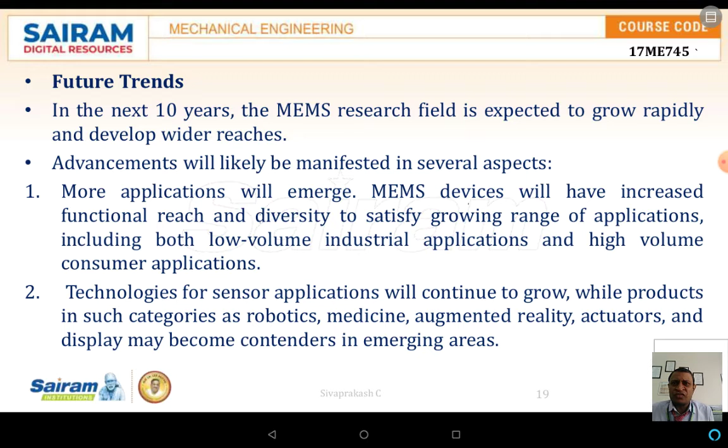Now as you know, MEMS devices are increasing with respect to function, reaching a diversity and satisfying a growing range of applications, especially industrial volume and consumer applications. The technological applications have grown rapidly, especially in the field of robotics, medicine, augmented reality, actuators, displays, and may become a contender for the emerging areas.

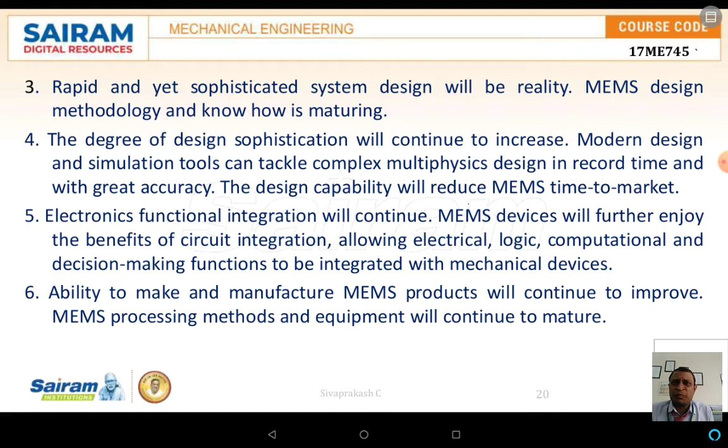As we know, electronics functional integration will continue, and MEMS devices will further enjoy the benefit of circuit integration, allowing electrical concepts, logical computation and decision making functions to be integrated with the mechanical devices. The ability to make and manufacture MEMS products will continue to improve, and MEMS processing methods and equipment continue to mature.

MEMS capability will advance steadily to a point that a true fabless MEMS development model may become a reality, especially in the field of packaging technology and implementation with smaller size components. MEMS production will migrate to a larger wafer size. The competition will intensify as MEMS products gradually achieve greater function with small size and lower cost.

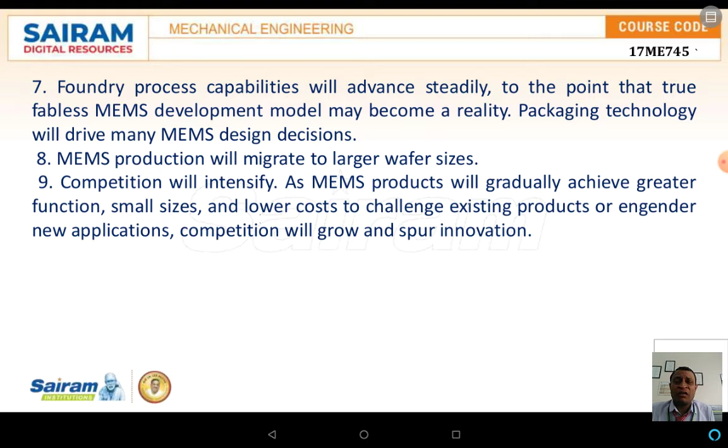The challenging and existing products and the competition in the market is also a major issue. Now as you know, MEMS is playing a major role whether in the mechanical, electrical, medical, or even the defense field; it has matured.

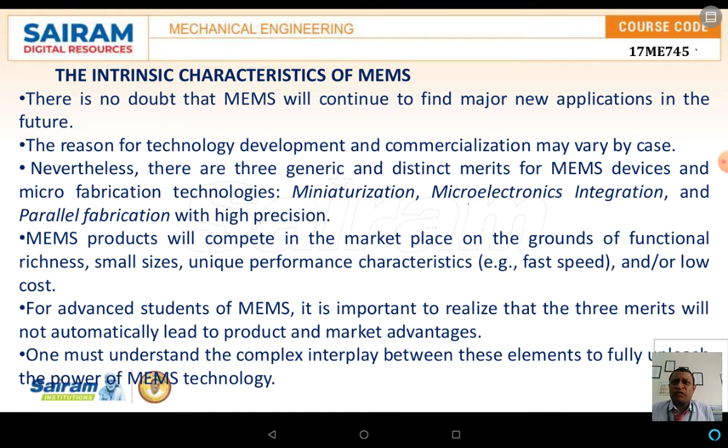Now the intrinsic characteristics of MEMS: MEMS will continue finding major applications in the future. The reason behind this is miniaturization, microelectronic integration and parallel fabrication with high precision. MEMS products will compete in the market on the grounds of functional richness, small size, unique performance and faster speed. The technology has advanced and reached the heights of nanotechnology.

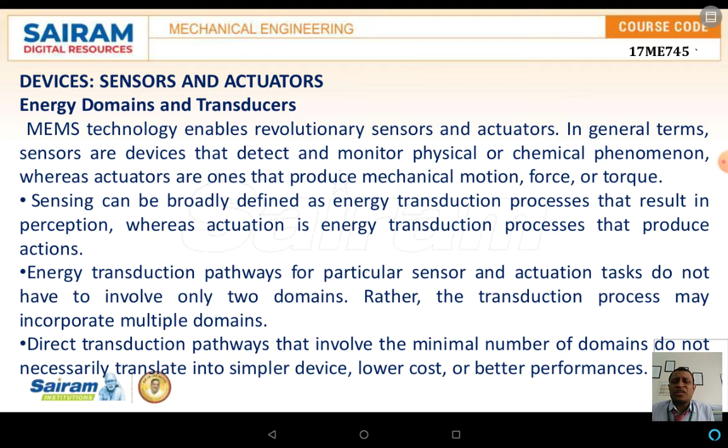Now, take the example of devices like sensors and actuators; the MEMS concept has been implemented in the field of sensors as well as actuators. In general terms, sensors are devices that detect and monitor physical or chemical phenomena. Sensing can be broadly defined as an energy transduction process that results in a perception, whereas actuation is an energy transduction process which produces action. That is the major difference between the sensor and the actuator.

Now take the example of the radiative field, magnetic field, thermal field, electrical field, mechanical or even chemical field. These fields have seen an invasion of MEMS technology. Not only these fields; even the medical field has been reached.

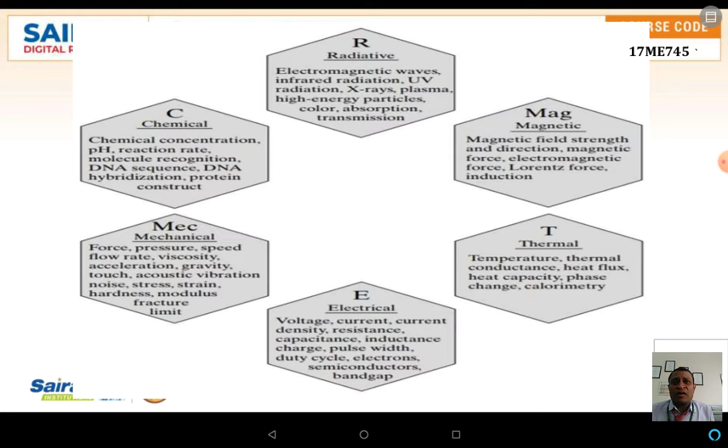Take the mechanical example: forces, pressure, speed, flow rate, viscosities, strains and stresses can be measured very easily using MEMS technology. Now, the sensors and the actuators.

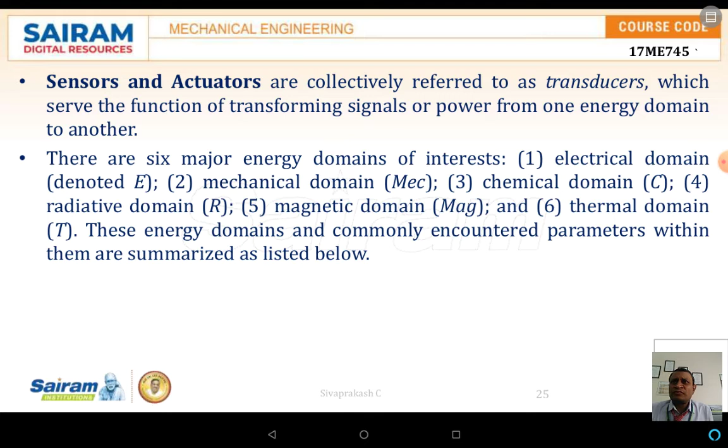As you know, the sensors and actuators are collectively called transducers, which serve the function of transforming a signal or power of energy into another form. Now, there are 6 major domains, especially the electrical, mechanical, chemical, magnetic, and thermal fields. These are all the fields where MEMS has encountered a parameter within them, and it has even reached the maximum limits. Now, the total energy within the system can coexist in several domains and can be shifted among the domains under the right circumstances.

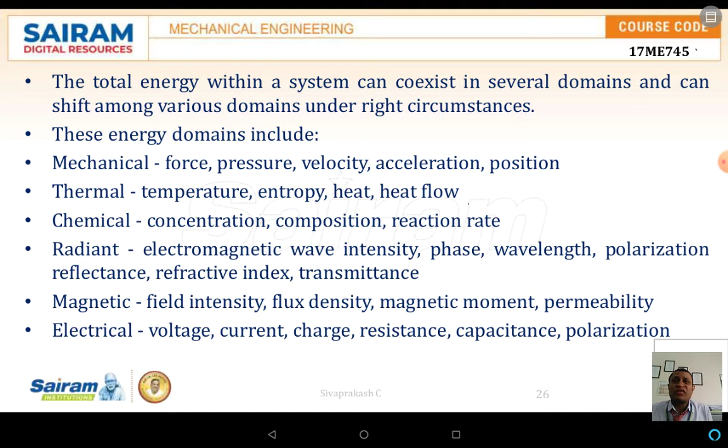In the field of mechanical, as I told, the forces, pressures, viscosity, velocity, acceleration, position, and even the stress and strains, all these things can be measured and detected very easily by using sensors. The sensors are of two categories. The first one is a physical sensor. The second one is a chemical sensor. Another sensor which has evolved is the biological sensor.

Now, the physical sensors are used to measure physical variables such as forces, pressures, temperatures, flow rates, viscosity, strains, stresses, etc. The chemical sensors are used to detect chemicals; it may be in the field of chemical or in the field of biological also, like pH, binding strength, protein-protein interactions, and so forth.

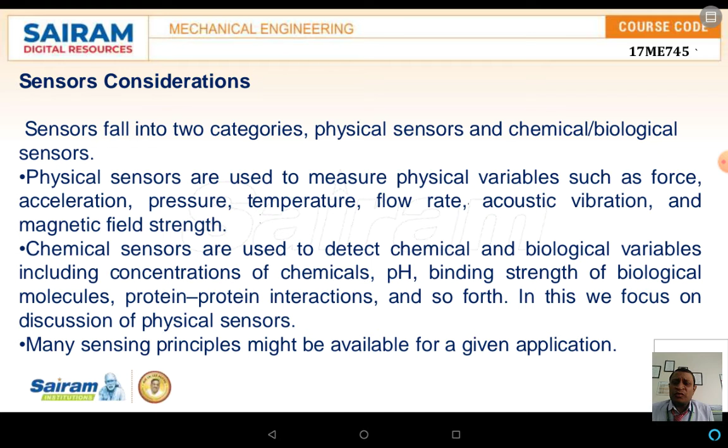There are many sensing principles available for a given application. Sensors are generally developed with a number of transducing pathways, and designed according to the sensor performance required. The most important sensor characteristics are summarized as follows. The main important parameter we normally consider is the sensitivity. The sensitivity is defined as the ratio between the magnitude of the output signal and the input signal.

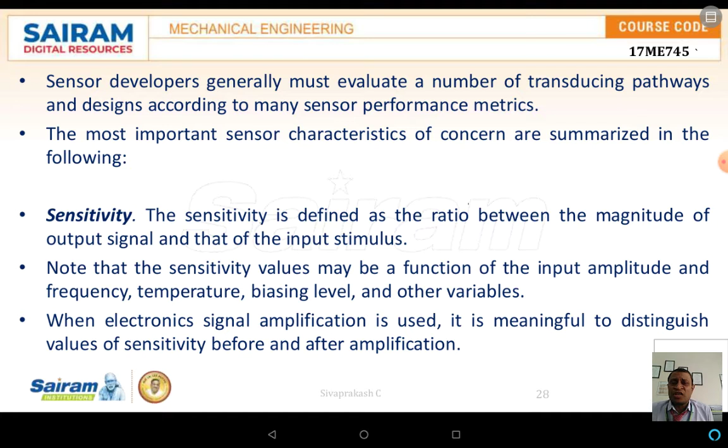If MEMS is used, either in the field of mechanical, chemical, or biological, it should measure accurately, whether frequencies, temperatures, forces, or strains. If it is not in a position to measure the exact values, then automatically there will be a failure.

The next part is linearity. If the output signal changes proportionally with respect to the input signal, the response is said to be linear. The linear response of the sensors reduces the complexity of the signal and also the processing. But here the accuracy of the sensor also plays a major role. Precision is the ability of the sensor to give the same reading when repeatedly measuring the same quantity under the same condition. This is the most essential, especially in the field of biological concepts, mechanical, or chemical.

The responsivity, or resolution, is also known as the detection limit, or minimal detectable signal. This term signifies the smallest signal that it has to sense, relative to the noise associated with the transducer element and the circuit.

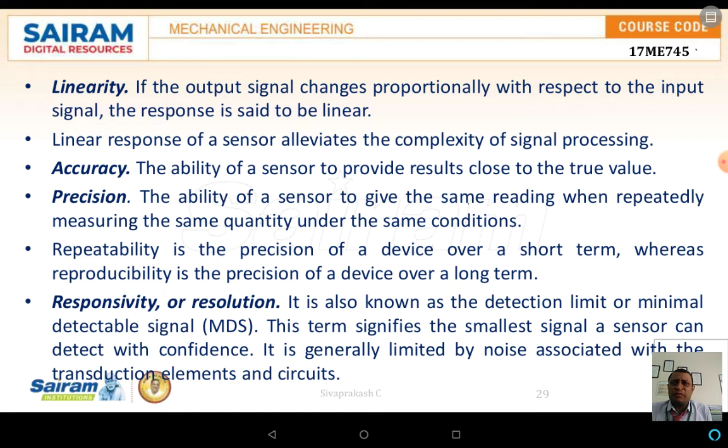Another one is noise. Noise can be applied to anything that obscures the desired signals. Noise can itself be another signal, which is interference. The amplifiers, resistors, capacitors, or inductors in the circuitry can also generate noises. These noises come with unique signatures.

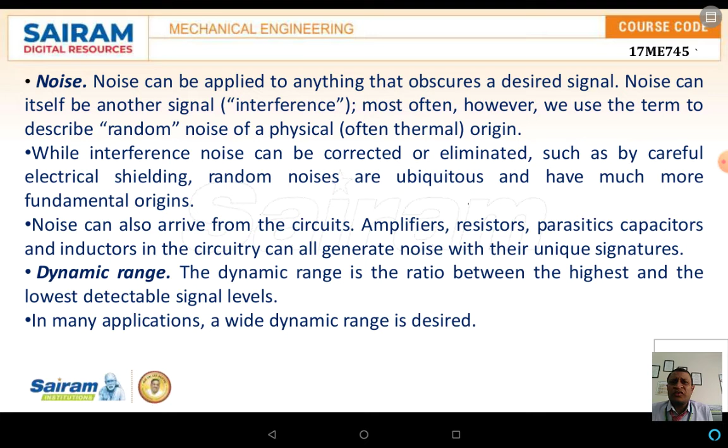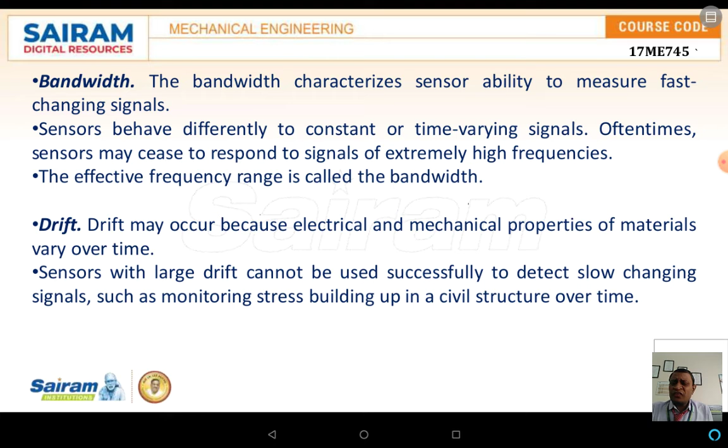The sensor reliability. As we know, sensor performance changes over time and when placed under harsh conditions. The sensor's reliability is another major factor that we have to consider while designing MEMS.

That too, especially at what application, or maybe at what temperature range, or it may be at what environment or what humidity it is working.

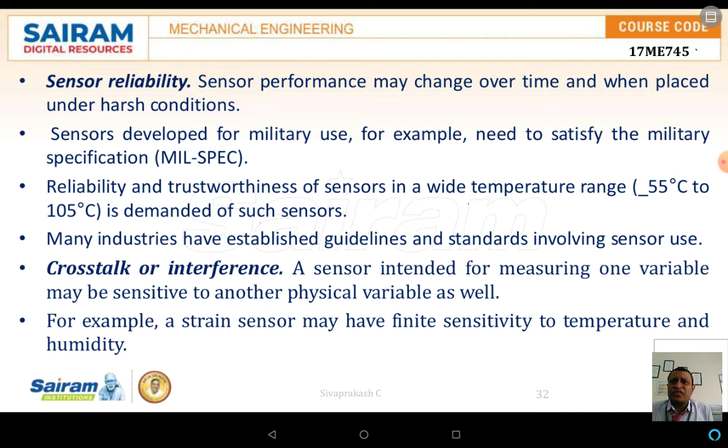Now if you take an example with respect to the crosstalk, or it may be interference. See, as you know, in the case of MEMS there are so many devices. Either it may be the ICs, or circuits, or capacitors, or amplifiers. These should not develop something like interference, and should not change the value, or any parameter. This is another major concern, especially with respect to the sensors.

Now if you take an example of an acceleration sensor with sensitivity in one particular axis, the response to acceleration in the other orthogonal axis should be ideally zero.

The development and also the cost and time. As we know, day by day the market is changing depending upon the consumer or the customer. It is always desirable that a sensor's development process be inexpensive and fast. The time to market is a major concern. See, if within a time new inventions are released, then automatically the previous one will be a failure.

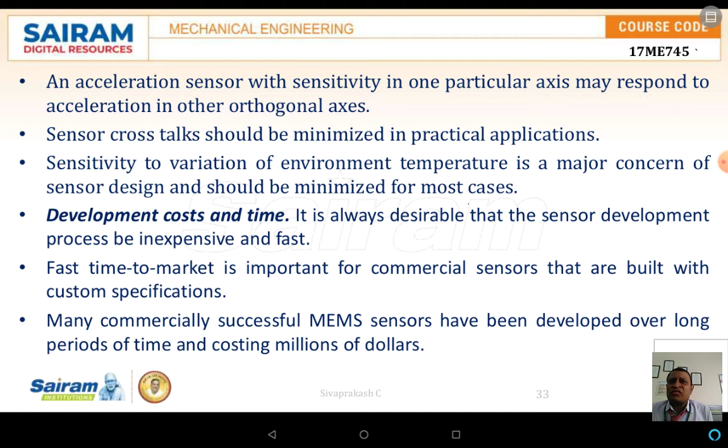There are many commercially successful MEMS sensors that have been developed for a long time, but the cost is also another parameter. Next, to reduce the cost as well as the development time, the level currently enjoyed by the application specific integrated circuits industry would be very appealing.

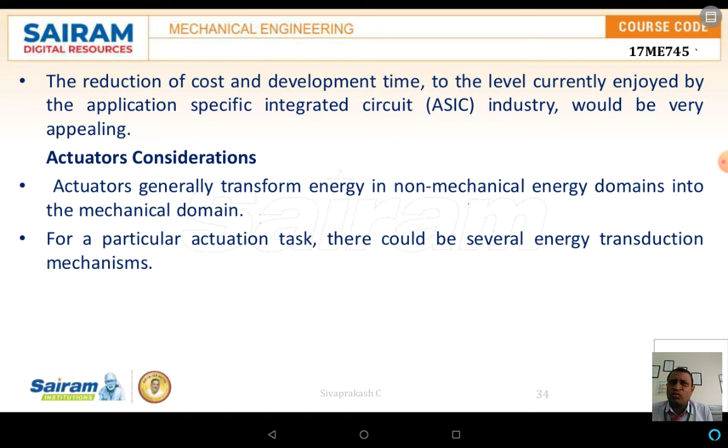As an actuator consideration, actuators generally transform energy from a non-mechanical energy domain into the mechanical domain. But particularly for the actuation task, there could be several energy transduction mechanisms. Now here, a comparison with respect to the actuation method; one example I will take here.

In this case, the magnetic actuation. The movement or force is due to the interaction between the magnetic domain and the external magnetic field; that is the general description, but it requires a magnetic material and magnetic sources. But here, the magnetic materials we are using should not disturb the other elements which have been used in the MEMS devices.

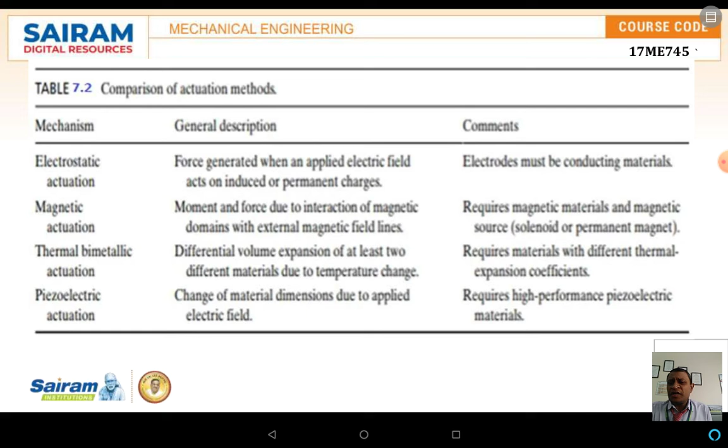The following are some of the criteria that we consider during the design and selection of an actuator. The first one is the torque and force output capacity. As we know, actuators have major applications, especially in the mechanical or chemical field. These actuators must provide sufficient force or torque for the task at hand.

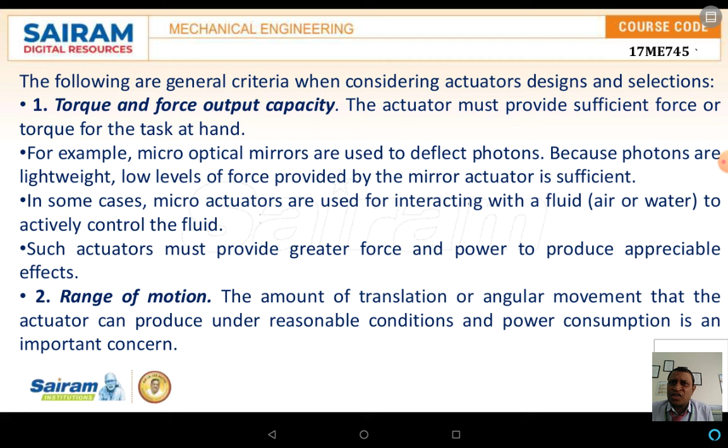For example, take micro optical mirrors which are used to deflect photons; because photons are lightweight, low levels of force provided by the mirror actuators are sufficient. The range of motion, something like the amount of translation or angular movement, should be measured under reasonable conditions with small power consumption, which is also an important concern.

The dynamic response and also the speed. As you know, actuators must be able to produce a sufficiently fast response. If the response is poor, automatically the system will fail. From the point of view of actuator control, the intrinsic resonant frequencies of the actuator devices should be greater than the maximum oscillation frequencies.

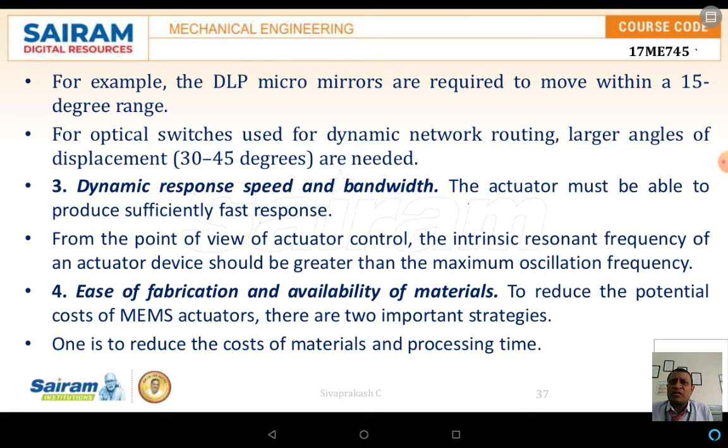The next one is the fabrication and also availability of the material. As we know, depending upon the market and the potential cost of MEMS actuators, there are two important strategies. One is to reduce the cost of the material and the processing time. The second one is to increase production yield and the process in order to produce more functional units in each batch.

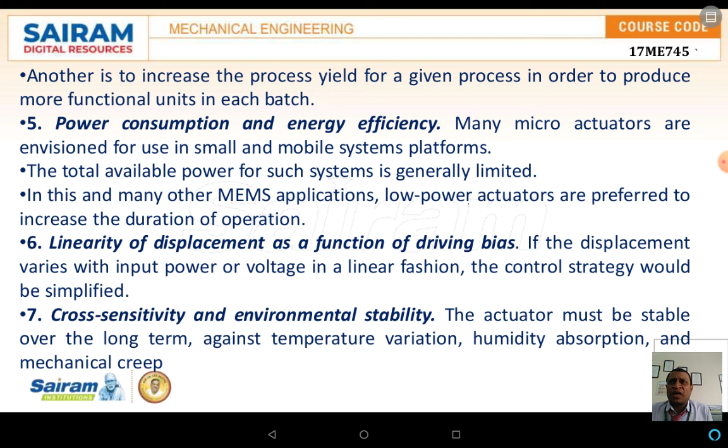The power consumption and also energy. See, MEMS devices, which have major applications, should consume very low power. And even the cross sensitivity and environmental stability is also a major concern, especially working over the longer term with temperature variations, humidity absorption, and even mechanical creep. Long-term stability of such actuators is extremely important for ensuring commercial competitiveness and success.

The footprint of an actuator is the total chip area it occupies. In the case of a dense actuator array, the footprint of each actuator becomes primarily a point of consideration.